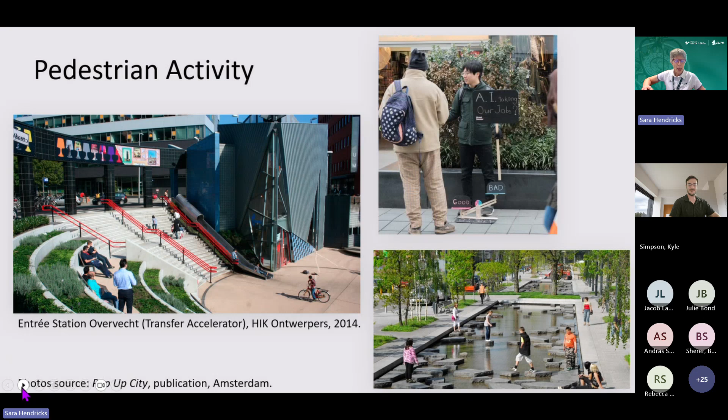So I wanted to leave you with that. And then ask you what you think are the benefits of walking and bicycling. So it's your turn to kind of share what you think are some benefits, and use the chat. Tell us the kinds of benefits that perhaps in your experience of walking and bicycling you enjoy.

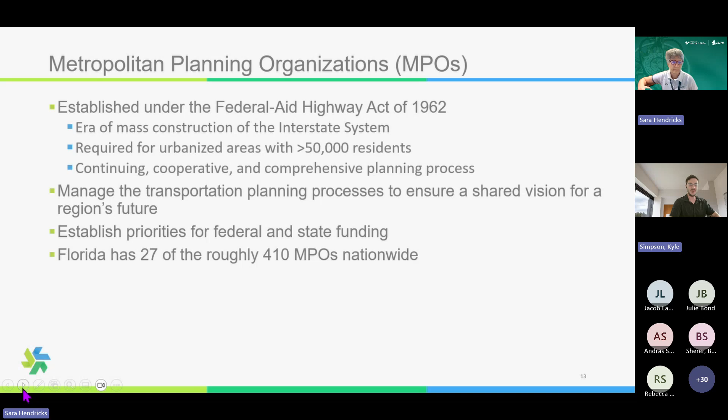So the major functions that we have is creating a long-range transportation plan that currently goes out to 2050. In that, we look at existing and expected population and employment statistics so we can plan for the amount of people and jobs we anticipate having 25 years from now, like physical infrastructure, roads, sidewalks, bike lanes, transit facilities. They take a long time from an idea to reality on the ground.

Having a clear vision of where we want to be helps us achieve that vision. How we achieve that is through our priority project lists. This is kind of a 5 to 10 year look at where we want to be 25 years from now. These are the projects we're going to fund either for engineering and design or construction over the next 5 years to achieve that vision.

Each MPO has one of these, and these are the lists FDOT then uses when doing the 5-year work program of what they're going to build. At Forward Pinellas, we have discretion on how we prioritize that list, and basically FDOT starts at the top of the list and works down until they run out of funding for that year. Then we do the process all over again next year.

At the top of our list, we include $1.5 million in capital funds for our transit agency, PSTA. This is something newer where the funding has just now worked its way into the work program. FDOT's work program is 5 years. When something's added, it's added to the 5th year.

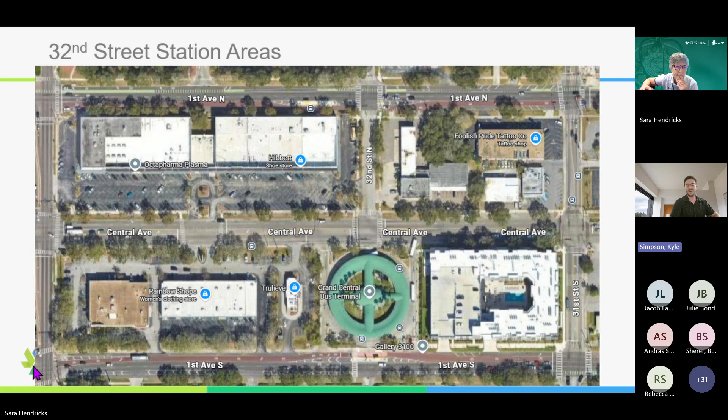This is what the station stops look like. First Avenues used to be 3-lane one-way pairs, and now there's a dedicated bus and turn lane on the left side of the street with island platforms. Part of the corridor has a bike lane, and part of it the bike lane was shifted to Central Avenue. As part of this, to increase safety for everyone, there's a little island on the near side of the intersection before the far side, where the actual transit stop is.

On the right side, we put in planted median islands as a kind of curb extension to try to narrow up the street and make it feel like a place where people should expect activity and expect people to be walking and biking, and behave accordingly.

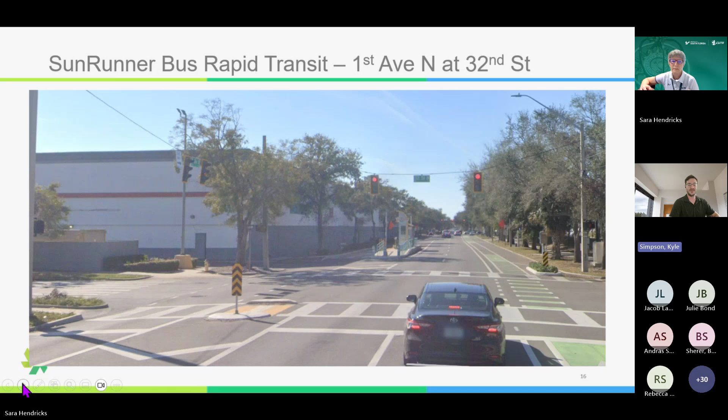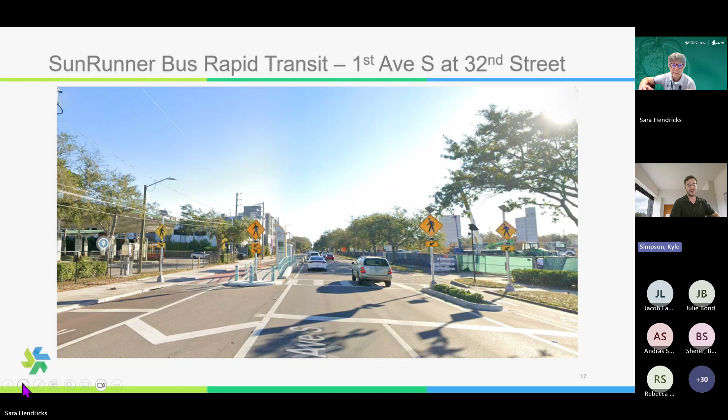But the Grand Central Station and the major transfer point that's there. And right now under construction on the far right of that picture is a huge multifamily housing project or complex that is in conjunction with land for the St. Petersburg YMCA. So we're going to have a bunch of even more people living near all this transit access that's provided. So if you go ahead to the next.

So whenever we're looking at access to transit facilities and just active transportation in general, it's a really different animal than designing a highway. The details matter a lot more, and sometimes those details are hard to work with. So street lighting is a big one, and then sidewalk obstructions and landscaping.

So the pictures on the right side are the same street, like 4 blocks apart from each other. So one, you'll see drainage. That's always a challenge for us, especially in developed areas of the county where it's kind of legacy systems. We're not starting from scratch with anything. It's always retrofitting. And so making sure we don't have residual ponding and drainage issues right where we expect someone to walk. Kind of on the side of sidewalk obstructions as well.

Again, not necessarily a typical engineering issue, but anytime there's maintenance of traffic, so cones, signs, pylons, they often get knocked over and then just lay on the sidewalk for months and months until someone kicks it out of the way or the company finally goes and picks it up. So there's an engineering component to all this, but also the operations and maintenance is really important and can really make the experience decent or treacherous.

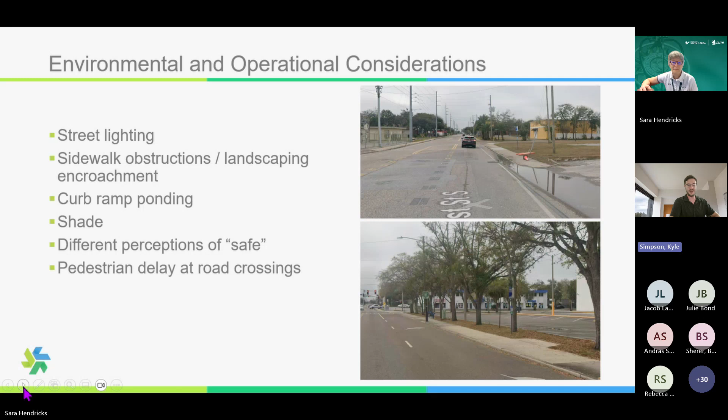And I think this all gets to the point of pedestrian safety is often perception as well. Like something can be by the book, safe, quote unquote, by all the engineering manuals, but it doesn't feel comfortable and thus it's not perceived as being safe. So I think that's a really important thing to keep in mind while we're designing these facilities and looking at maintenance of things - it might be safe, there might be a sidewalk, but what's the context of that sidewalk? And is it a place that people would actually be comfortable using or accessing?

If you go to the next slide. So we're gonna jump a little bit from an urban setting to something that we see this a lot around Florida. It's a big intersection. I actually went through here earlier going to our district office, our Pinellas FDOT office.

So Ulmerton Road's a state road, and then 49th Street's a major county road. If you have really good eyes, you'll see the crosswalk, that's the north-south crosswalk on the east side of the street. From curb ramp to curb ramp is over 160 feet long. So if you go to the next slide,

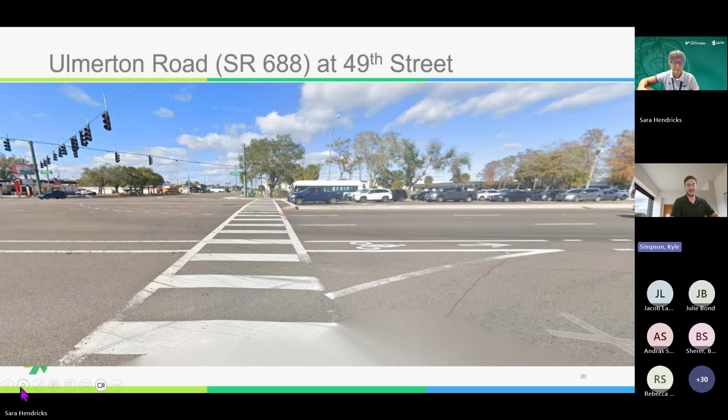That's what it looks like. You'll see that there's a busway in the distance. So there's good transit service on Ulmerton Road, as is the case with a lot of our huge streets like this in Florida - they're often the ones that have the best transit service because that's where the jobs and the multifamily housing are. So it's kind of the most uncomfortable place to walk is often the place where everyone needs to access either housing or employment or services. So how can we make that work better together?

So if you go to the next slide.

So just to provide a little more context, if you're not from this area, there's around 53,000 vehicles a day on Ulmerton, and 70,000 on 49th Street, the north-south road. So that's a lot of traffic, and we have to take that into account.

If we're calculating signal timing, you have to provide a minimum of 7 seconds with the walking man illuminated. Then we calculate the pedestrian clearance phase, the flashing don't walk, at 3.5 feet per second. So at this intersection, the minimum time you could allocate to a pedestrian signal is 53 seconds.

And that's a long time. This is a major intersection, so your cycle might be that long anyway. But oftentimes when you're crossing Ulmerton Road at a minor side street, your pedestrian signal timing is going to drive a cycle that's way longer than you would normally allocate to the side street itself. So if there are ways we can reduce the crossing distance, that can help with traffic operations because we don't have to provide such a long pedestrian signal time.

So some of the conflicts we often hear of and see at these types of intersections: someone going westbound on Ulmerton Road making a right to go northbound on 49th Street, so right on red.

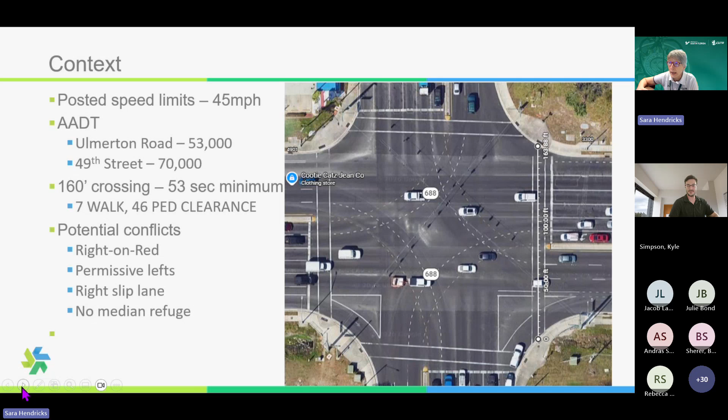And we did have one other suggestion from Deborah: a leading pedestrian interval, protected turns, splitter islands, and no right turn on red signs. Yep, those are all great suggestions.

So I went through and you all already hit on some of these. You can do static or a blank out no turn on red. Static means it's just a sign that's out there all the time, which might be less effective than a sign that turns on and says no turn on red when someone has pressed the pedestrian button. And then again, we could not allow a left turn when there's a pedestrian.

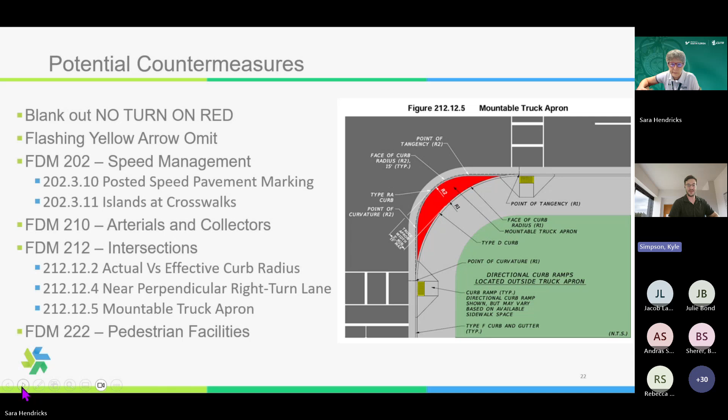And then, over the past couple of years, FDOT's been really good about putting opportunities to improve intersections within the Florida Design Manual. So I pulled out some of the best resources that I'm aware of that touch on all this, and we will highlight some of these as we go forward. So if we go to the next slide.

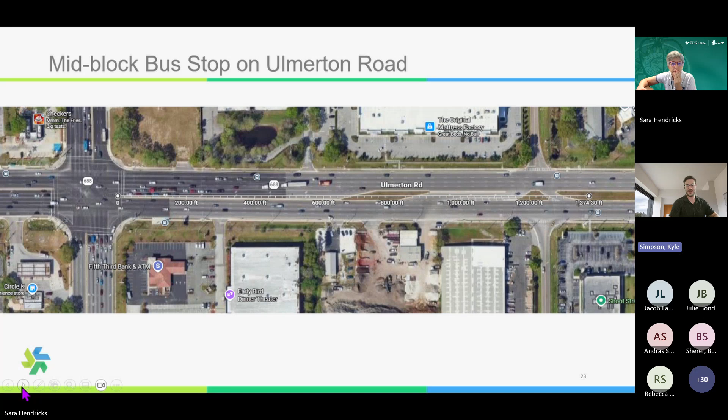Another thing we often have is mid-block transit stops. This one is just down the road from the intersection we were talking about, around 1,400 feet down the road. If we're calculating at 3.5 feet per second, and someone gets off the bus on the south side of the street to go to a business on the north side, we'd say it's safest to cross at a crosswalk, right? But to do that is a 14-minute delay, and that's not a reasonable ask of someone. No sane person is going to do that.

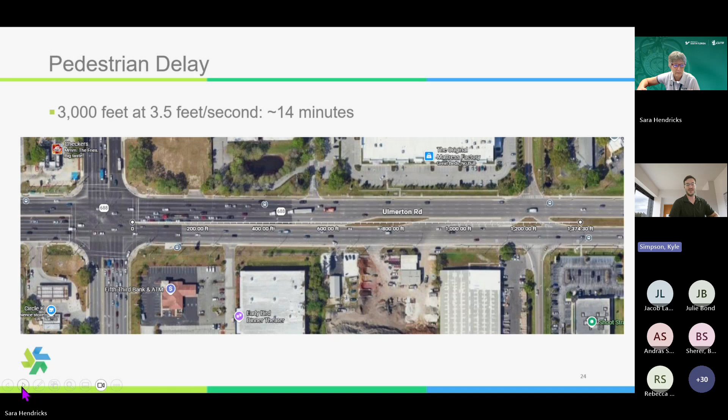Designing our environment in a way that makes doing the right thing the thing people do intuitively is really important. Pedestrian hybrid beacons are something our district has been installing a lot of on these types of roadways lately, and when we do that we coordinate closely with PSTA and the local community. This basically provides a safe mid-block crossing to get someone across the road without having to play Frogger. The warrants for these are a lot lower than a traditional traffic signal, and we're getting to the point where they can be installed proactively instead of waiting for problems to happen. We can anticipate that this is a place people want to cross, and provide a crossing location before it pops up as a problem in our crash data.

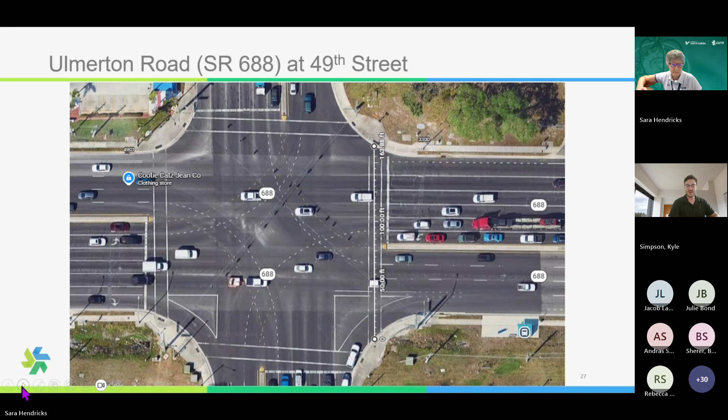To get someone driving to stop for someone in a crosswalk, it's a lot easier for them to intuitively do that if they're going 20 miles an hour or less. Once you get above that speed, it's really hard to encourage someone to stop like they're supposed to. So again, it's designing the environment to facilitate the behavior we want to see.

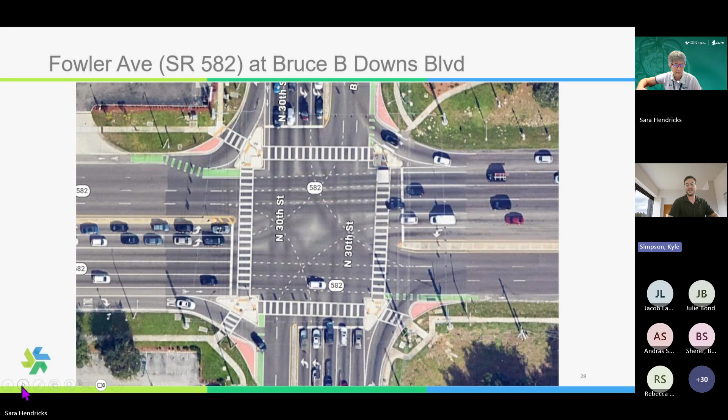Often here we say Florida is special, right? Like we have problems because we're special and nowhere else in the world has big roads. I recently had the opportunity to go to Barcelona, Spain, and they had big roads too.

It's a lot of traffic - like 6 to 8 lanes each direction. A little different context, but still, there's cars and they're going fast. So what are some of the differences they've implemented and have seen better safety outcomes from?

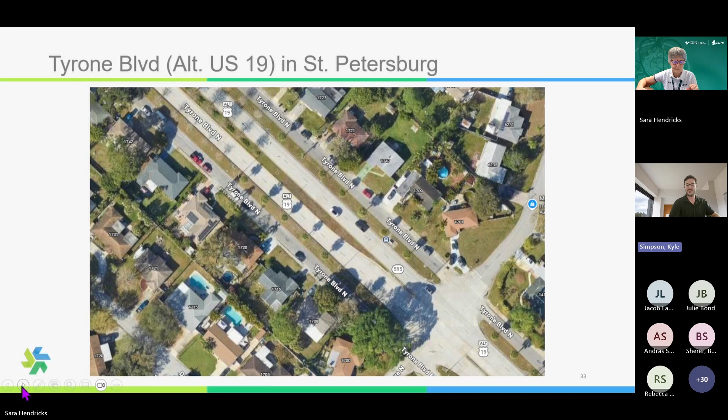We also have transit accommodations. It might be nicer if the bench was on the curb side, but instead someone walks on the frontage road, which has a speed limit of 25 instead of 45 on the main line. It's another example of how we can accommodate the regional traffic we need while providing options and a pleasant experience for all users out there.

So I just want to close with this: a lot of access to transit and designing for people walking and biking is about meeting people where they are, versus saying the problem is you didn't cross at this intersection. Oftentimes the way we design for traffic just doesn't apply directly to walking and biking, so we need to make sure we're considering the environment they're in.

Same goes for when we're looking through crash data. Often a crash on a state highway like Ulmerton Road will just say the problem was the pedestrian wasn't in a crosswalk, and that's labeled the cause of the crash. Instead we should look at where it happened and the context—where was the nearest crossing, was this a rational choice they made, did they get off a bus and then cross right there? We need to take in the whole context of why things happen, or even more importantly, look at what could happen during a project and design the environment so it doesn't come up in a crash report in the future.

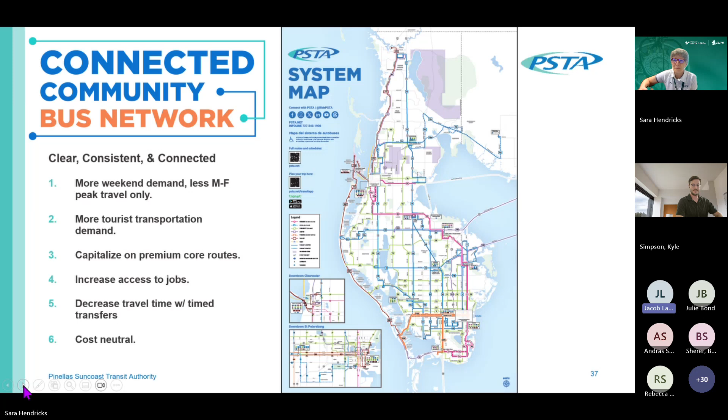We do still have several percentage points of riders, 4% system-wide, who are taking a personal bike or scooter to a bus stop. This emphasizes the importance of working closely with our friends at Forward Pinellas and with the various cities on designing safe and comfortable pedestrian and bike infrastructure to get to and from transit. People get to the bus stop in other ways besides walking and biking, but that's certainly the minority of trips.

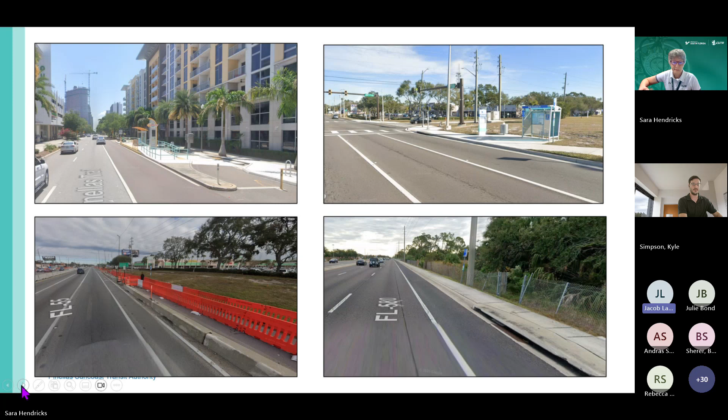Again, why those continued conversations with Forward Pinellas and the cities is so important so we can improve safety. But in a context like this, being able to improve the passenger experience, even taking ridership aside for a moment, is limited. Here in this example, you'll notice vegetation that's likely mangroves or other things that would be very onerous to try to get right-of-way acquisition for. So realistically, there are just some areas like this where we'll do the best that we can. But again, as a transit authority with no land use power, to be honest, only so much we can do, but we still want to, to the extent possible, work with our friends over at Forward Pinellas to see where we can incorporate design strategies from an infrastructure perspective to improve the experience.

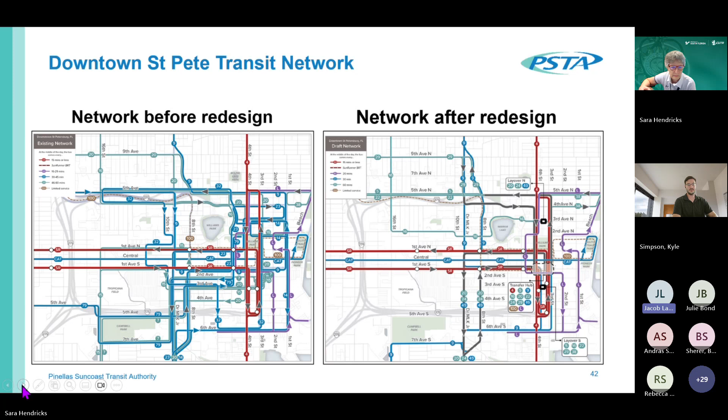Yeah, so we do hear a lot about this from riders. I think the thing we hear the most is the desire for more bicycle capacity. Right now we're limited on most of our buses to only 2 slots for bikes on the front of the bus. Unfortunately we're not able to exceed that, but we get requests all the time from riders to find ways to increase the capacity for bicycles.

Another thing that came to mind with the increased bicycle usage on Sunrunner is that on that service we've increased bicycle capacity. There are 3 bike parking facilities on board where you can roll the front of the bike into a mechanism that will lift the entire bicycle. So we have room for 3 bikes on board. And since there's a lot of standing room only, people can actually bring their bike and stand with it on the bus if those 3 slots are taken.

Unfortunately, that's not something we're able to do on the rest of our fleet. The only exception is if it's the last trip of the night and all the bike slots are taken, then the bus driver is allowed to make an exception. Otherwise, we're limited from a bike capacity perspective, which is unfortunately the answer we have to provide to riders. I think that's where identifying spots for bike parking in the long term could be ideal, in areas where there's more demand than space we can accommodate.

Thanks, let's take one more question. It looks like we've got one for you, Jacob. Allison Moss says, I like the redesign of your network and it seems like it would operate much more efficiently. I wonder, however, if you received complaints from those used to the many hyperlocal routes and how you responded.

Yeah, no, that's a great question. Despite all the improvements in the network, it was a cost neutral redesign, so you're definitely not going to be able to make everybody happy in a cost neutral redesign. I think overall, one of the measures we use to say we improved access is the number of jobs people are able to get to within an hour, particularly on evenings and weekends where our service really ramped down. So there were a lot of difficult conversations with folks who were used to the same bus route for decades.